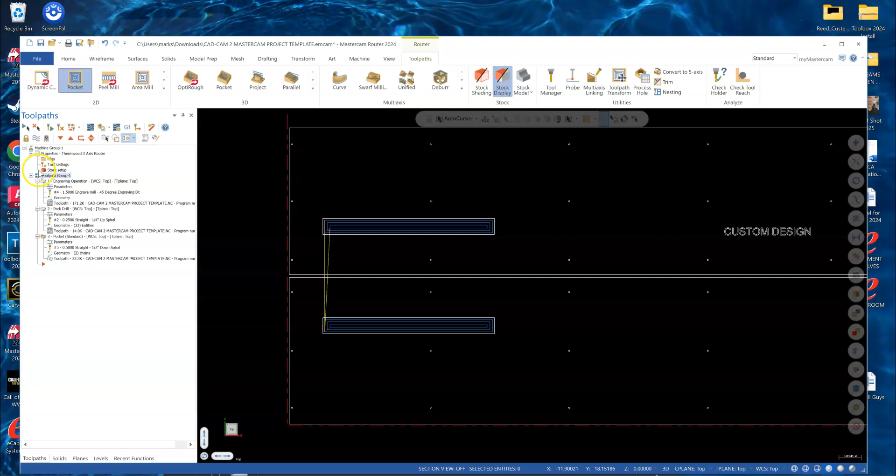In this video, we will demonstrate how to create a contour toolpath in Mastercam. The first thing I'm going to do, though, is go up and click on the four little circles, and I'm going to turn all the toolpaths off. That way, we're free to look at just what we need to.

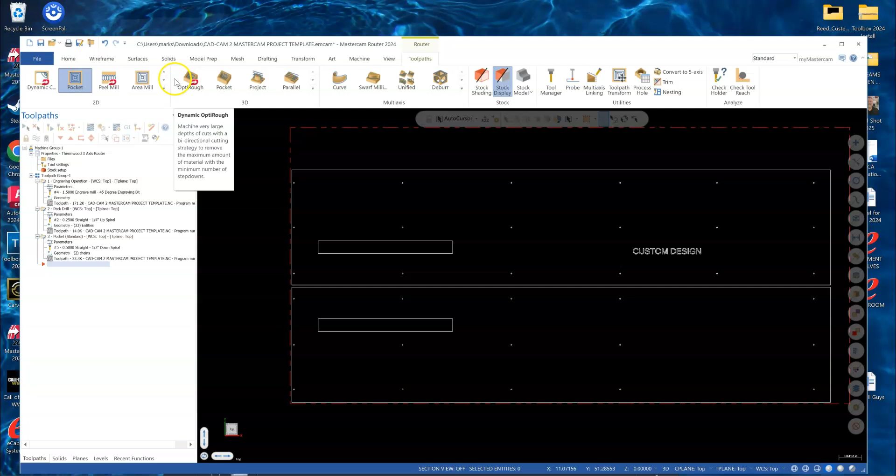So we're going to talk about going around the outside edge of our parts. Now that we've done all the internal machining, we're now going to free the part up from the material. So I'm going to go up to Toolpaths, and I'm going to go here and click on Contour. And we want to use the chaining method.

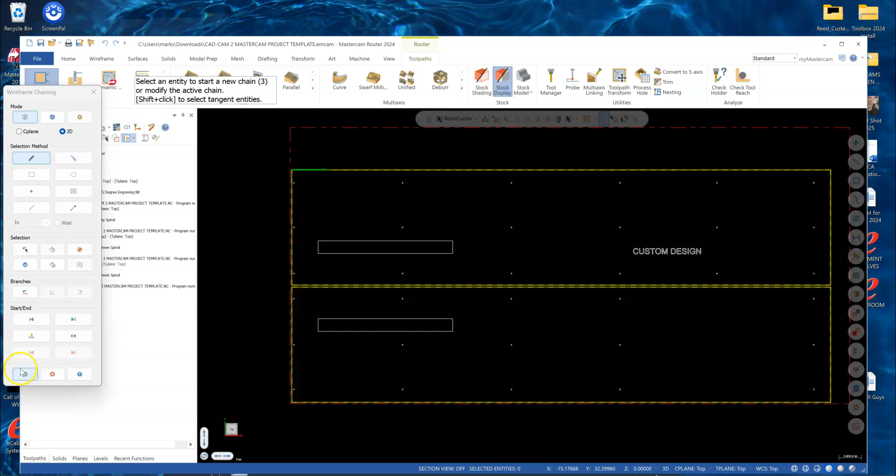Now, because we're on the outside of our object, we want to go in a counterclockwise manner. We want to make sure we're going counterclockwise. That will give us our climb cut. I will now click on our tool, and we have all but our last tool to create. So we are going to click on our flat end mill.

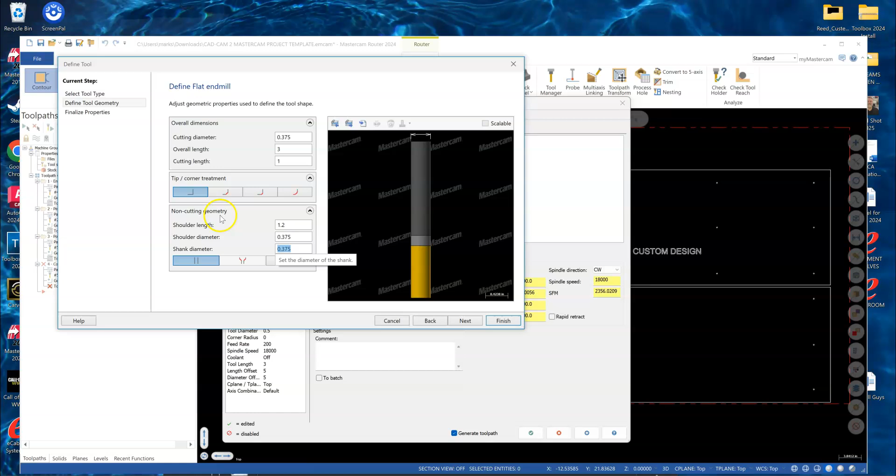We're going to go next, and this is going to be 0.375. Overall length is 3. Cutting edge as 1 is fine. Everything's fine on all these other things, so it automatically switches it over to 0.375 for us. And now, this is tool number 3. That's where it is on our CNC, and the number of flutes is 2.

Feed rate is 250, plunge rate is 150, retract rate is 1500, and spindle speed is 18,000. And we will call this our 3/8-inch compression tool. This is a tool that forces the top of the material down when it's cutting and the underneath bottom side up. That way we do not chip off the veneer on the outside of our material.

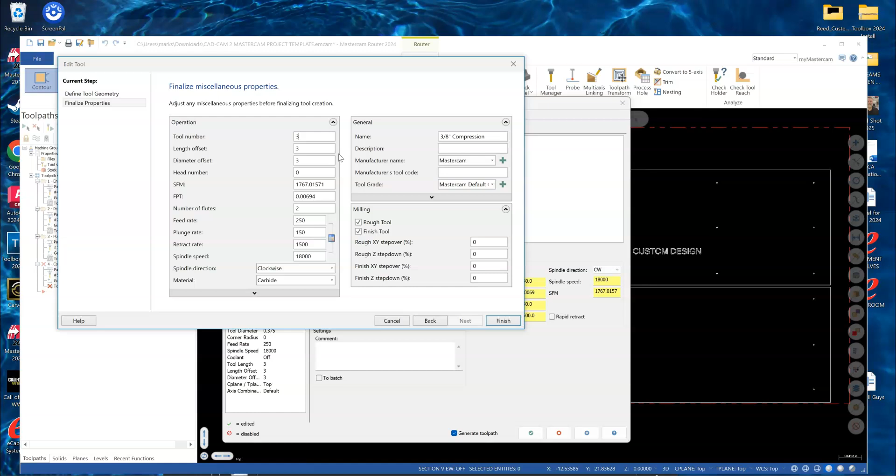And like all of our other tools, we've got to go back into Edit, go to Next, and we have to put in a 3. Finish. So we'll go to Cutting Parameters. And one thing we're going to do different on this, we're going to leave 0.02 on the floor. We don't want to free our parts up totally, to ensure our vacuum will hold properly, even though these parts are big enough to be held without leaving what's called an onion skin on the bottom, but it's just good practice in what we're doing in school.

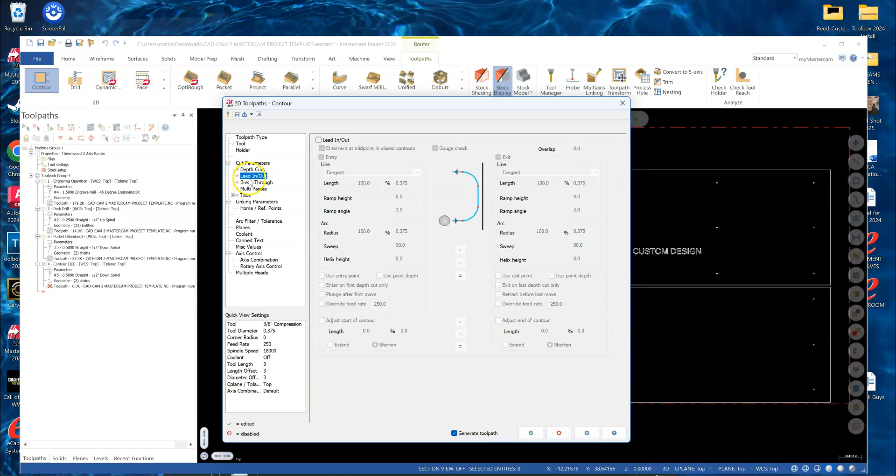We don't need a depth of cut. We do not need a lead in and lead out. We don't need anything except our linking. And we're going to go to Absolute, set everything to Absolute. Our retract will be 0.5, our feed plane will be 0.5, top of stock will be 0, and our depth will be negative 0.75 in this situation, but that depends on the thickness of your materials.

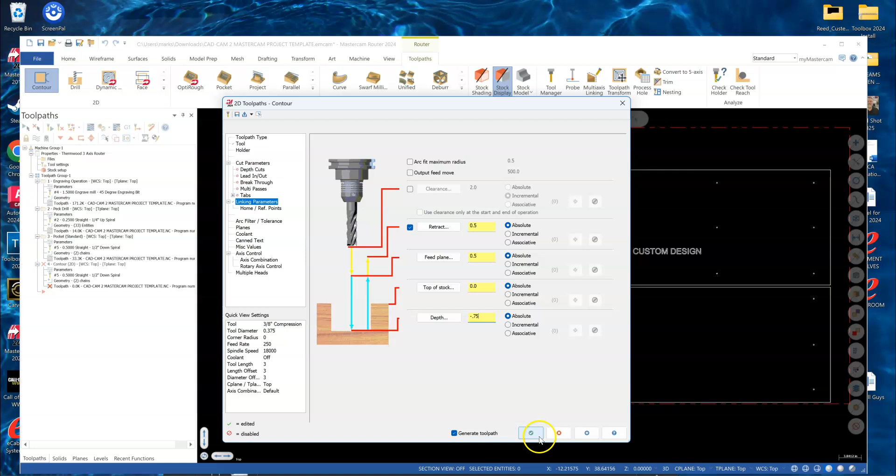And so now let's verify that. Let's watch it cut, and let's see it cut those parts out. And it did, but notice it didn't go all the way through, and that's because we left the 0.02. So what we'll do is right-click on this folder, move our mouse down, release, and go Copy After.

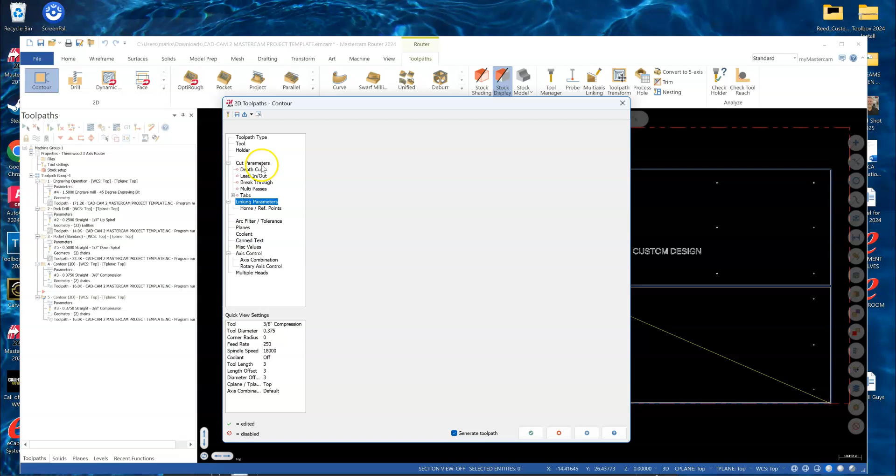Then we'll click on this one. We'll go back to our cutting parameters, and we'll remove the 0.02 and make it 0. Now we're going to go up and select all of our toolpaths. We're going to regenerate all of them, and you're going to watch all of them cut. And there's our parts. And that's how you create a contour toolpath.